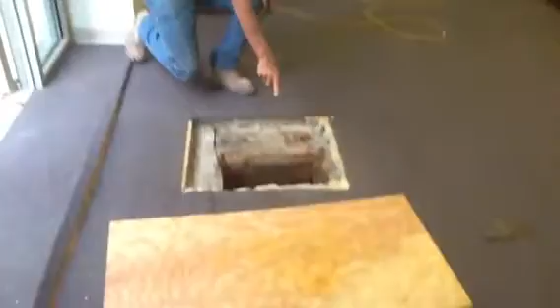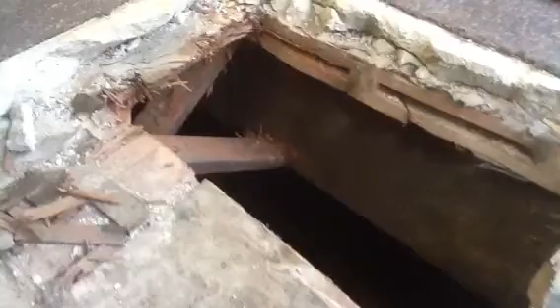There is one man right there. How you doing? My name's Dennis. I'm going to show you what's going on. About a year ago I came down and cut a hole in the floor so we could look. Sam, let's show him this. So we could see what might be going on. I put on a Tyvek suit and I got down in there, and what I found out is we have

our 2x12s, 3/4 plywood, furring strips, actually 3/4 plywood. This is a 1x. So I got down in there with the Tyvek suit, figured out what we should do, made a little design. Come here, Sam, let's show them the design. I'm down here now. I'll take it in this room.

So I put a bunch of sketches on the wall, figured out some columns, boards, steel. Wanted to figure out what it might cost to do it. And I came in with the price, it was like $55 a foot. I think we're doing it for $39 or something. It worked out well because I was able to put more thought into it. Reamhauser's the architect. He listened to everything I said, ran it by an engineer. They made my 16x16 piers, 18x18 piers. And they're doing it the way I wanted.

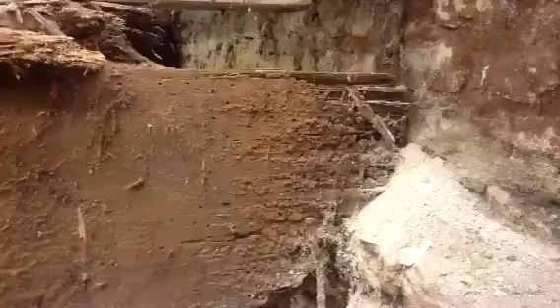This floor is sunk 4 inches. It's dropped 4 inches on this side. This is an outside wall made out of stone. Building probably built in late 1800s. That dashed line is the asphalt line, parking lot outside. Moisture came in and has just crushed the joist. It's completely taken it all away. When I come back in here, I'll be putting a concrete pier right there and another one there, and I'll show you a little bit more of that later.

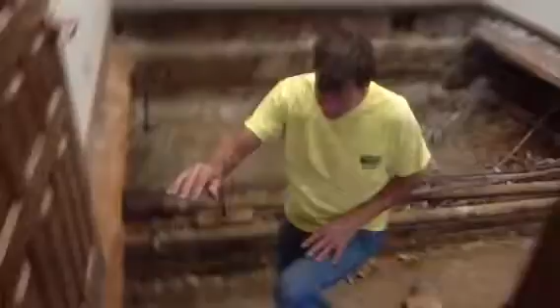Come on in here. We're starting in that room and coming this direction on this phase. There's 3 phases. So we'll tear all this stuff off yet today after we get the concrete out. These walls are non-load bearing. I know that because I can see how high they go. This was also a job I took over from a contractor that was failing, so I was involved with it years ago. But with this wall, what we'll do is we'll take all this out. This wall is going to stay. I'll put my lumber back underneath it because we can leave the base on and everything.

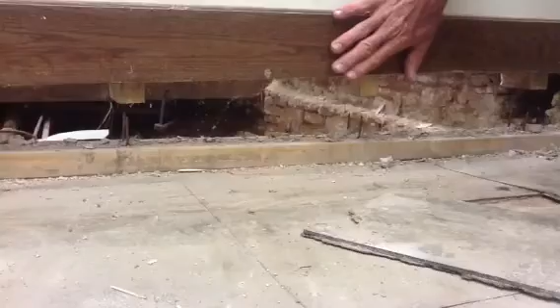The wall itself, it can't collapse. It can't even sink in the center. A little bit of sinkage, lots of jacks, you move things back in place. So these will stay. With the drywall on it, it can't collapse. I'll show you another one. Now this one, you can see we got a crack. Even the trim is moved. So when I get down into this one, Sam, there'll be some special shoring that I have to do to make sure it doesn't fall.

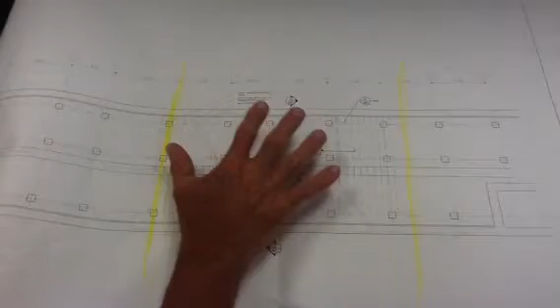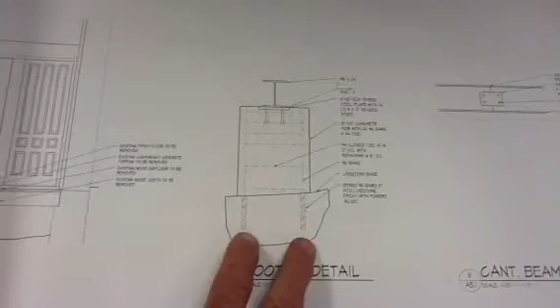The plan itself, right here, we're doing that section. This is phase 1, phase 2, and phase 3. Once we get all the existing material out of the way, we're building concrete piers. We have to jackhammer this off to get all the loose stuff out. We have epoxy rods going in 8 inches. We have a plate embedded into the concrete with Nelson anchors.

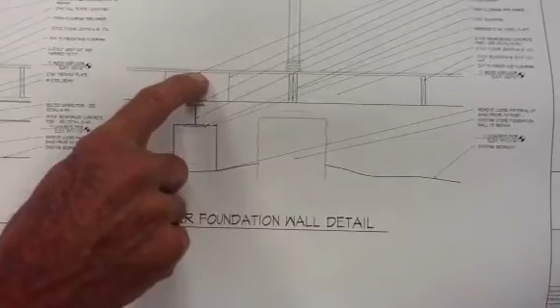Our steel beam. Then we come down here, on top of the steel beam, we'll be putting in a 2x6, then running our floor joist, blocking every 10 feet on center. Then we're going to do 3/4 plywood. I'm going to eliminate all the concrete. There's just no need for it in the building. I'm also addressing the problem that they don't have the money for, which is to stop some of the water that's coming down the hill. At least they need to get some venting in there. So I'm working with them on that.

How I've designed it, it'll easily get 100 years, just like these did, even if they don't switch anything. It's really fun to be involved in the beginning. I get to make decisions for the owner based on the materials, and the direction, and the sequence, and can totally save money instead of just having somebody that isn't sure about doing it. They might be smart being able to stamp those drawings, but trying to figure out how to do it and how to not take walls down. The other guys that they talked to, both of them said the walls, everything has to come out. Well, heck, you're probably adding $200,000 to that. So there'll be more to come.